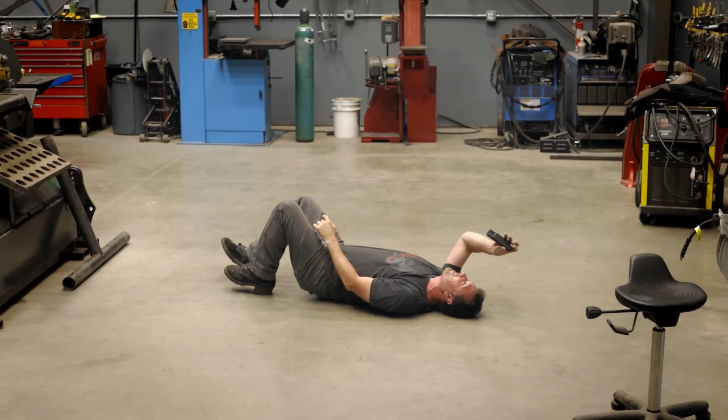Wow. Oh, this is so strange. This's gotta look weird. It's really cool.

My name is Jason, and I'm that guy rolling around on the floor. I've been a welder and fabricator for the past 20 years. During my career, I found many tools that I wanted to improve, so I started my own company where I can design better tools.

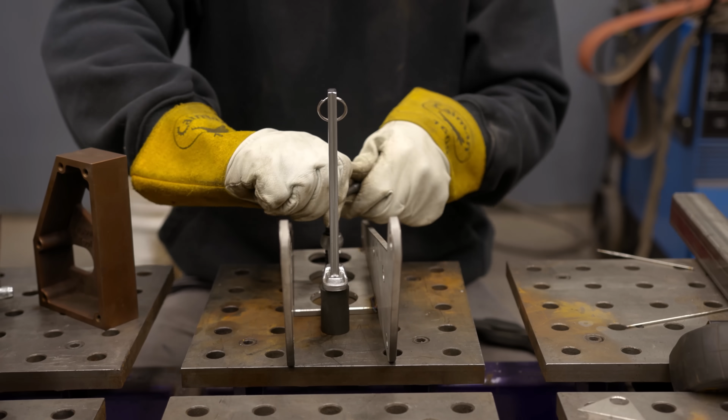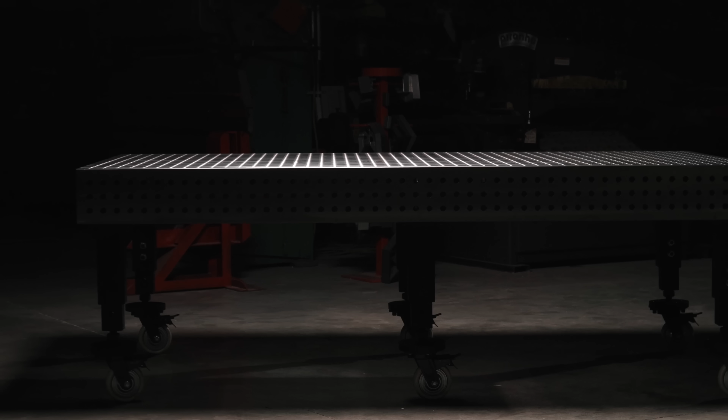This is the foundation of every workshop, a table. In my line of work, this table is called a fixture table. I've tested the industry's best tables and even prototyped my own, but unfortunately none of them have met my standards. So today I'm going to be building, hopefully, the world's best fixture table.

So what is a fixture table? It can be described as an elevated work surface with 4 or more stable legs, much like your kitchen table. But that's where the similarities stop. The fixture table's main design is to take many parts and hold, arrange, and steady them in a precise location. Once the parts are held together precisely, the next step is to often glue, fasten, or weld them together. Lastly, it aids in repetition. It's not uncommon to get an order for multiples of the same structure or product, so this helps you work quickly and effectively. Oh, and having a table that doesn't catch on fire is a real bonus too.

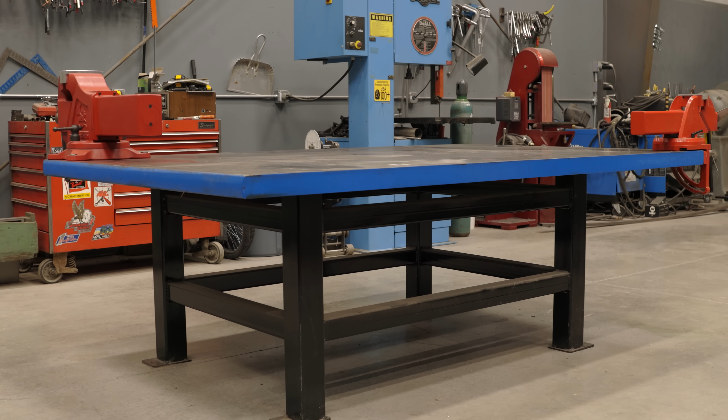So this is my very first fixture table, and it's a big piece of plate steel. This is probably considered the best welding table in the world to most people, but to me this table is just filled with problems.

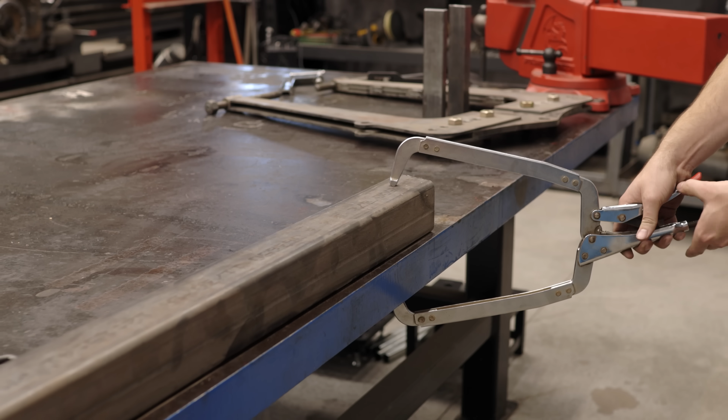The first problem you'll notice when fabricating or welding on a table like this is that you can only clamp around the perimeter, meaning you hold your parts on the edge. If you have clamps with a really long throat, that'll allow you to move your work more inboard. But how do you hold your components or parts in the middle of the table?

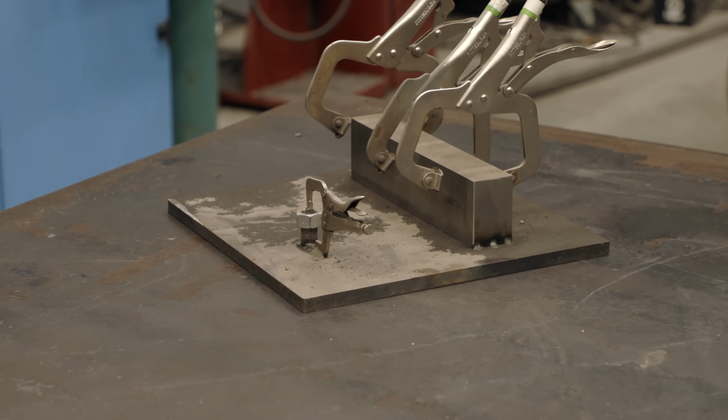The solution most people use is to actually weld the part directly to the table, just like this custom fixture. There's 1, 2, 3, 4 clamps dedicated for this part, and I can't use these clamps for anything else. What a waste of money. But this is what you've got to do when you have a table like this.

Hey, what the hell is this? Oh, you didn't really give any specific guidelines about welding.

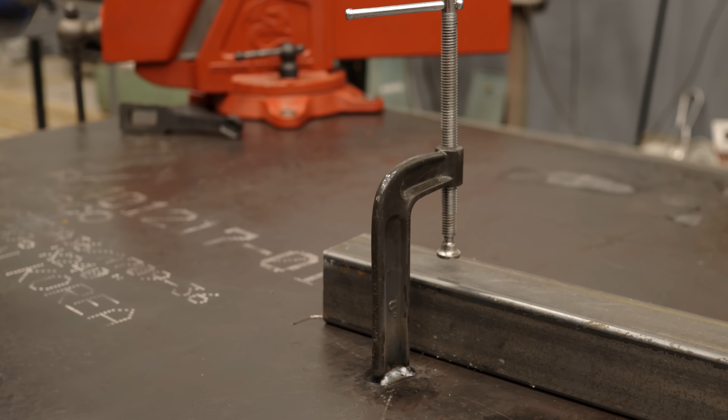The next problem after your fixture's been welded to the table is that you gotta come back and grind the goofy thing off. Not only is that slow, but it leaves the table surface compromised. And the more you do it, the more the table gets ground down, basically eliminating the flatness of your table.

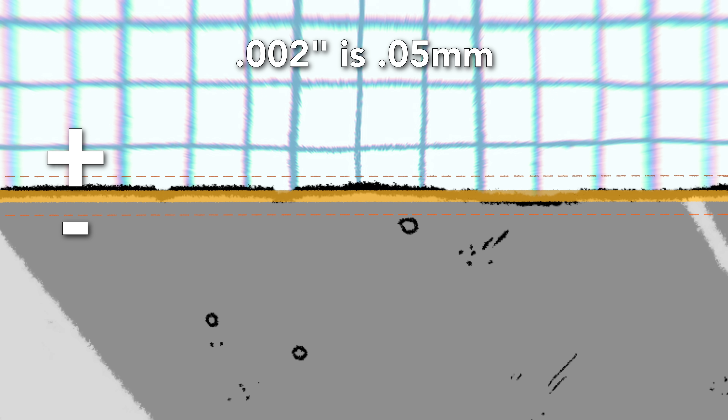I'm going to be using the word flat quite a bit, and I don't want you to confuse it with level. Level is when the surface is aligned with the Earth's horizon. So I can have a surface that's flat but not level. Let's talk about surface flatness - it can be described as the highs and lows of the table surface. We're going to be using aerospace flatness standards, like the guys that make airplanes and spaceships, who want their tables plus or minus 2 thousandths in a 2-foot area. So that's our target.

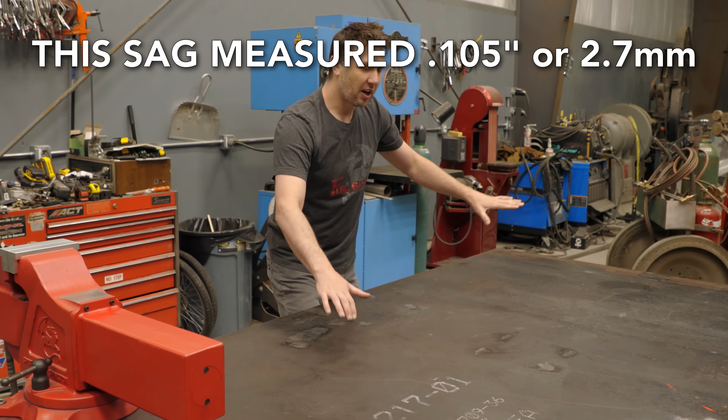So now we're back to another problem: flatness. This table is not flat because it's a piece of plate steel, and plate steel has a really wide tolerance of how flat it's going to be coming off the mill, so that's gonna be a problem too. Whatever I weld on top of this dished table is gonna follow that path. This is the same principle applied to building a house - if you start with a crooked foundation, everything above that is also gonna be crooked.

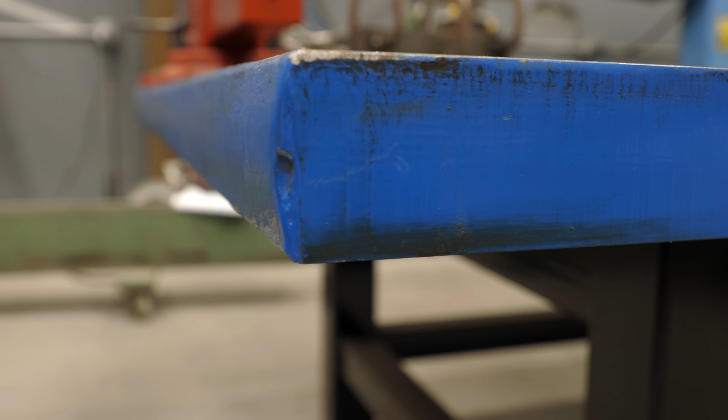Originally from the steel mill, somebody has cut this with a torch and it is not square - it's like an 89-degree angle. So I cannot use this surface and this surface as a reference. Not only that, the condition of the edge of this table is rolled because this is a piece of hot rolled plate. That's not even a flat edge to work off of or pull my tape measure from.

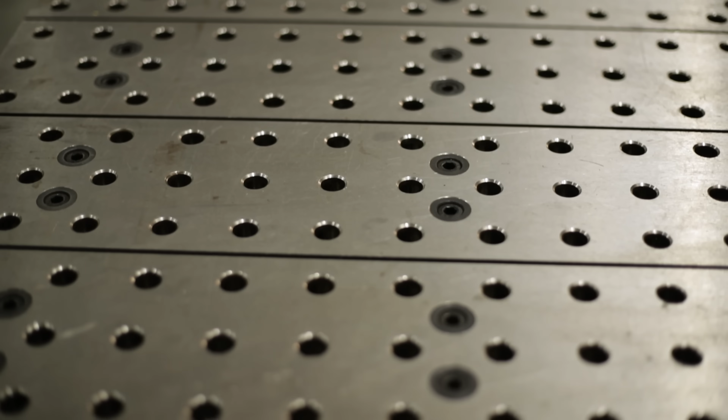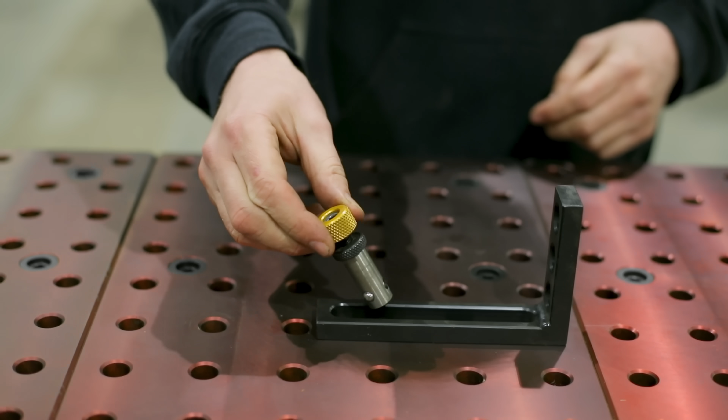Because this big huge piece of plate steel is a big problem, people have already come up with a solution: the fixture table. But even those tables aren't perfect, so let me show you. I've been collecting, studying, and reviewing these tables for years, scrutinizing every detail to find out which one worked best for me. But there's a lot of problems with them - most are the same size as a 4x8 sheet of material or smaller, and some are too large to reach across.

Some tables have holes that are spaced too far apart, warp, or even flex when they should stay rigid. And some of them just aren't even flat. I have really high standards on how I design my tools, so I wanted to fix all these problems with a new table design.

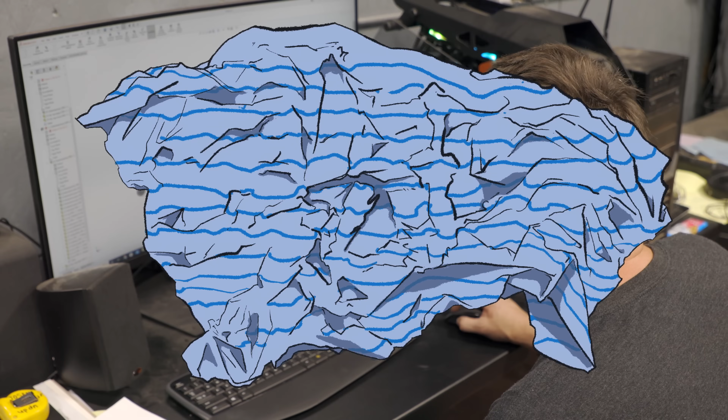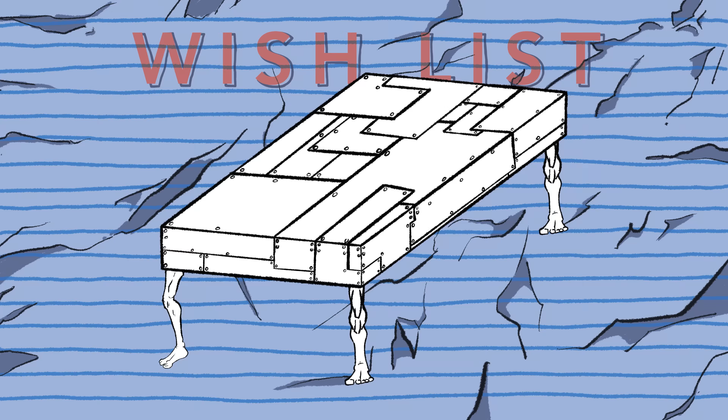Knowing all the problems with the other tables, it's time to create my fixture table wish list. First, I want the table to be a useful size. It'd also be nice for the table to be thick and heavy duty and built like a tank, and to maximize the surface area. Because I want the table to be really heavy, it's going to need some strong legs, and I'd like them to be able to elevate the table up and down. It would also be nice to move the table around without using a forklift. And I definitely don't want to weld anything to the table, so some clever way of holding the parts down to the surface would be nice.

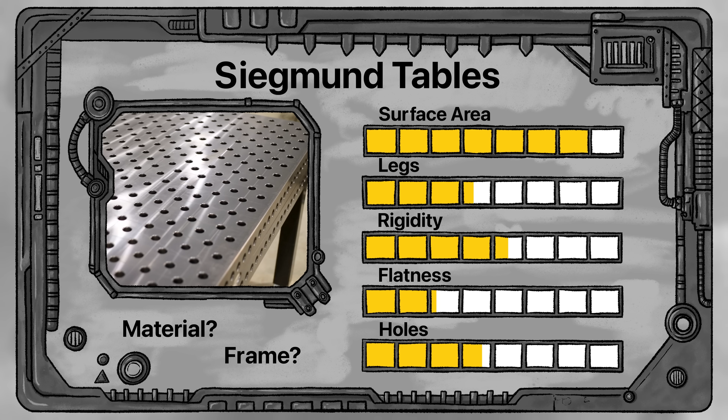Since I'll be designing a super table from scratch, we'll need a way to track its capabilities. Much like fantasy football, all the fixture tables I tested previously I've ranked in 5 individual categories. We'll look at each table that scored high in a specific category and try to meet or exceed it. But the only way we're going to find out is to actually build the table.

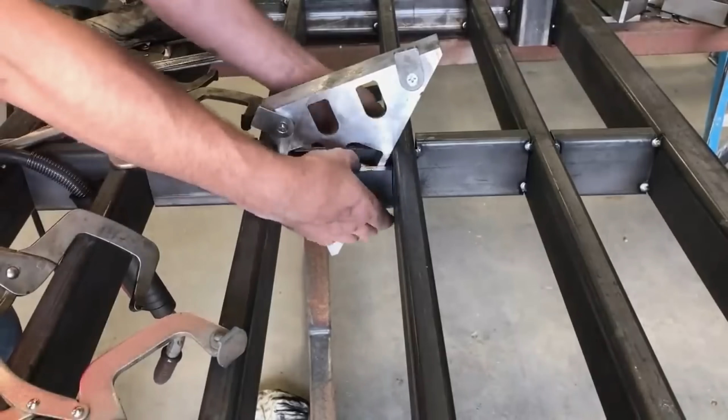So let's get started. When it comes to building a frame, I have 2 choices. One, like this style, which is a whole bunch of weldments or pieces of tube steel. The second frame style is what I call a platen, basically one big giant piece that's all one unit. So the main difference between these frames is the amount of parts.

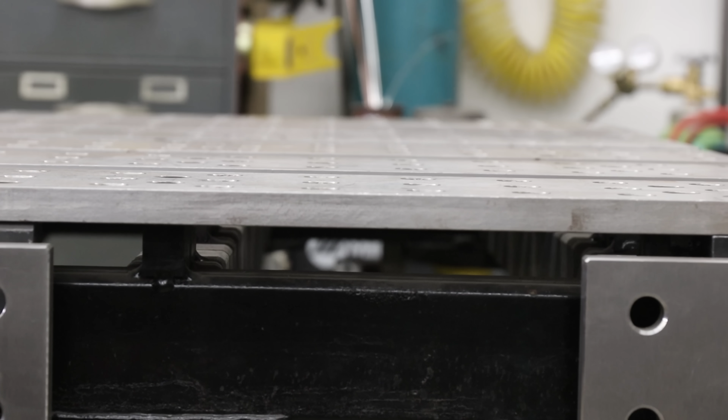My prototype table frame had a bunch of these pieces that all had to be welded together. Anytime something's welded, there's some slight distortion that happens to the frame. In order to remove the distortion and get the table back into specifications, it generally needs to be machined or milled. The other solution to a welded frame is to just cast the frame.

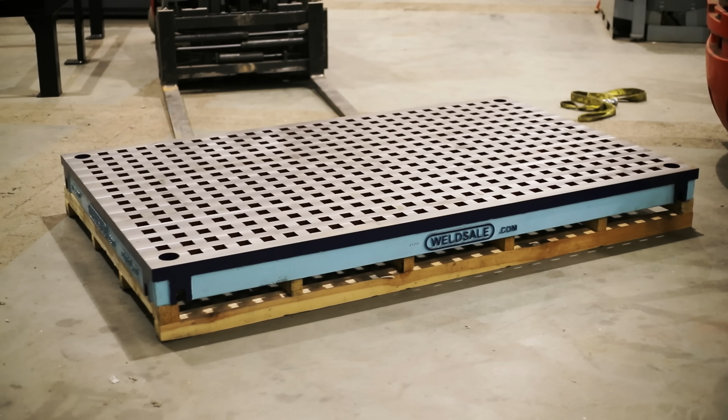And we call that a platen. Having the frame cast all in one piece keeps the parts to a minimum, plus it makes it easier to assemble. The only table that I reviewed that was entirely cast was the Weldsale table, and it excelled in its frame design, so I'm going to build my table with that platen frame, just like that one did. Being cast also allows me to be more creative in the design decisions later on.

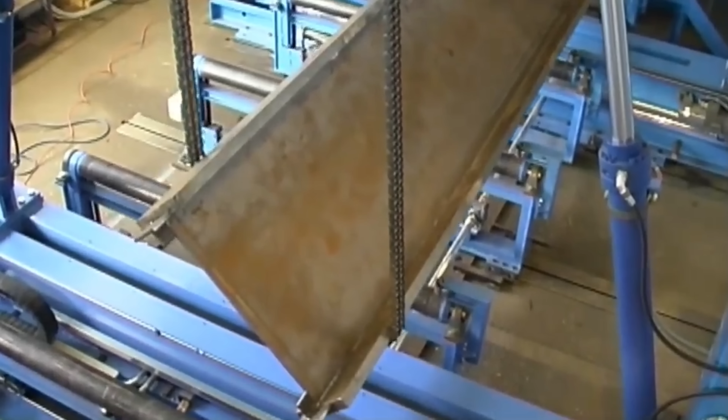So when it comes to welding table material, we have quite a few options. We have some exotic stuff, like maybe stainless steel or aluminum, but really when it comes to practicality we have 2: cast iron and A36 steel. By choosing cast A36 steel, I know it's abundant and readily available, and it can be made into any size I want. There are a few downsides though.

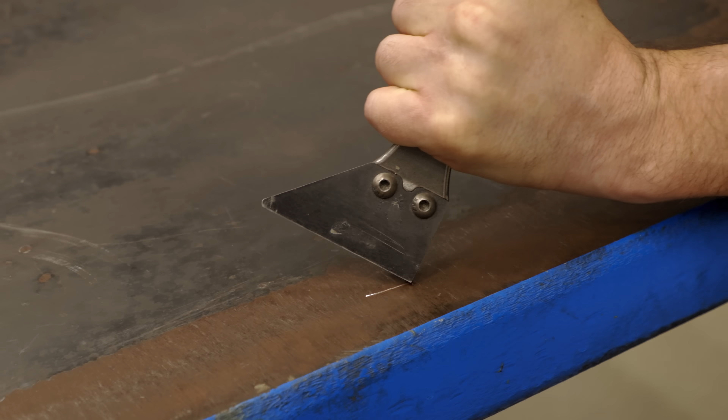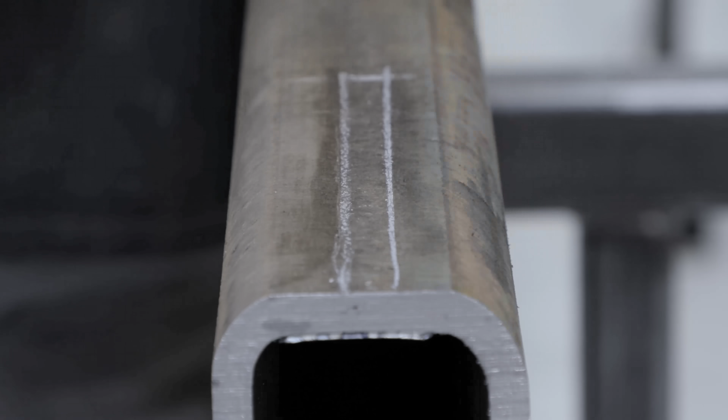When the table gets scratched, it leaves a nasty burr, meaning the scratched material gets displaced on the surface and leaves a bump, making the table less flat than it was before. Steel can also be subjected to distortion from heat, which is bad if I cast it too thin. And finally, the nemesis of all fixture tables is weld spatter, the byproduct of welding. These little BBs end up sticking to the table, and oh man, do they love to stick to steel. If I choose steel, I'm going to have to put a coating on it to prevent the spatter from sticking, or another solution is to just change material altogether.

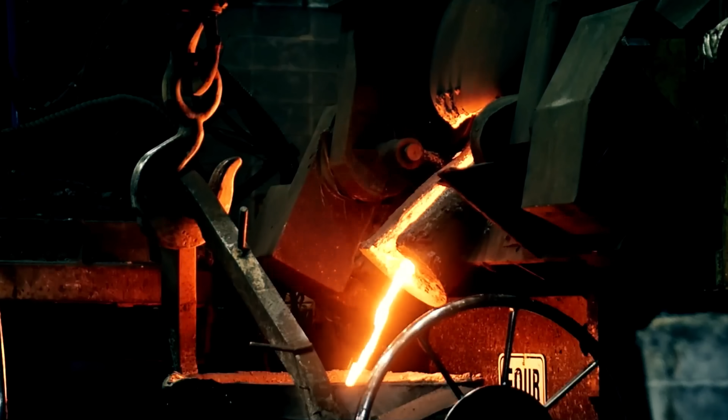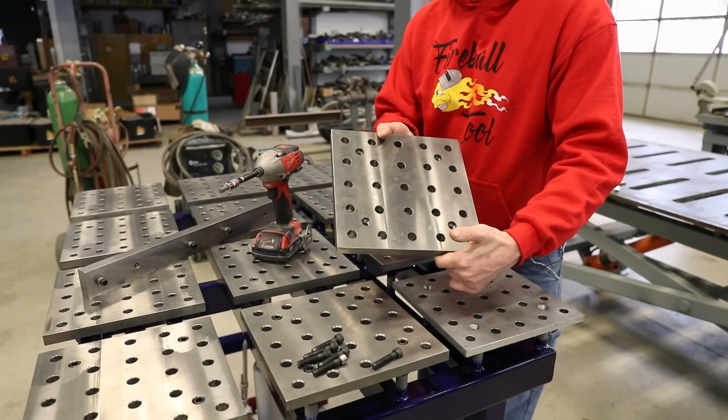We can change it to gray cast iron. One of the benefits of cast iron is that it's really hard to weld to, making it a perfect material for a welding table. That way weld spatter doesn't stick to it, making it easily maintainable. Plus it's good at conducting heat, which means less heat distortion — that's why you see engine blocks, cylinder heads, and brake rotors made out of the stuff. Another benefit is a scratch on cast iron will just turn to powder and not displace itself on the surface, so the table can remain flat and require less maintenance.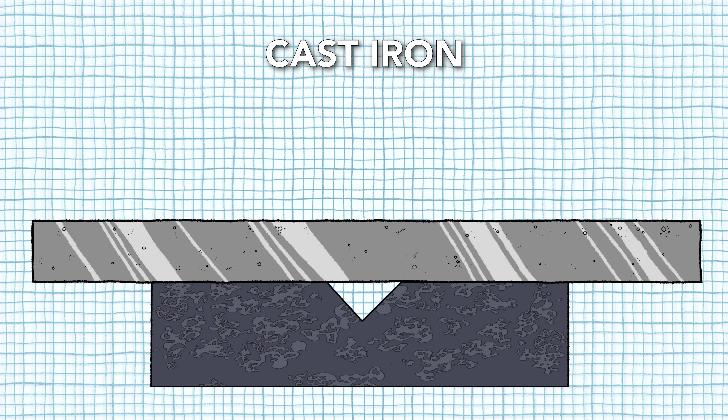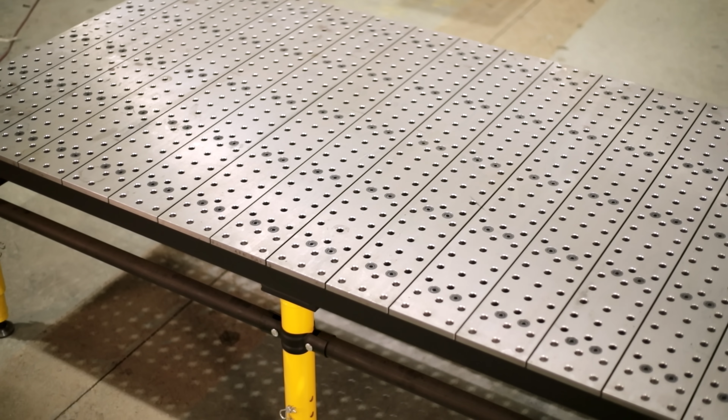The only table I reviewed that was made from cast iron was the WeldCell table, so I know my table can be a platen while still using cast iron material, which is what I'll be going with. How big should I actually make this welding table? The most common size is 4 feet by 8 feet long.

The problem with the 4x8 table is that my material is the exact same size, so putting it on the table will cover up the entire surface, practically rendering it useless. Why do welding table manufacturers even do this? I find it so frustrating.

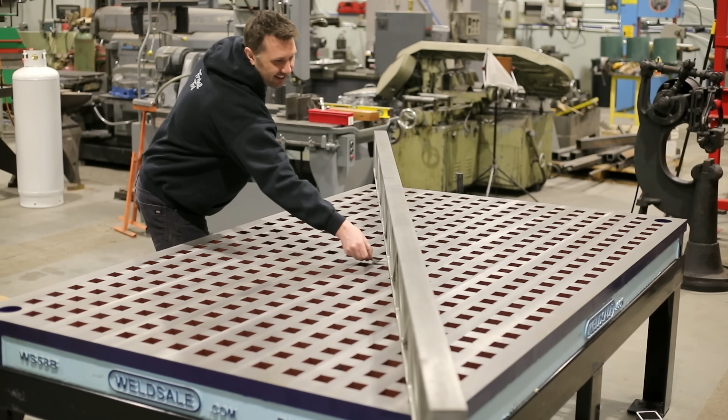Even metric tables are slightly undersized from 4x8 and have the exact same problem, so I know I'm going to make my table a little bit larger than that. But if I go too large, it will be really difficult to reach across comfortably, so I've found 5 feet to be the maximum width for that reason. As for length, that can really be anything I want, until I run into the problem of transportation and unnecessary cost. As long as it's over 8 feet, that's going to be helpful.

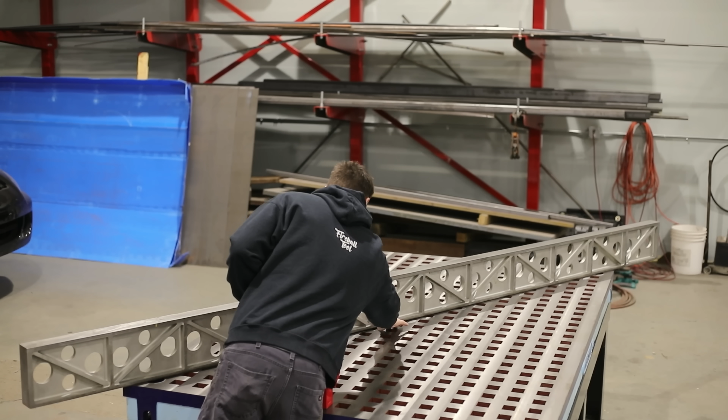The only table I reviewed that was larger than 4x8 was WeldCell's 5x8 table, which has a wider width but still only 8 feet in length, giving a surface area of 40 square feet. To find the golden size that's not too long and not too short, I'll oversize my table by 6 inches in both length and width. That's going to give us almost 20% more surface area. That only gives me 38.25 square feet.

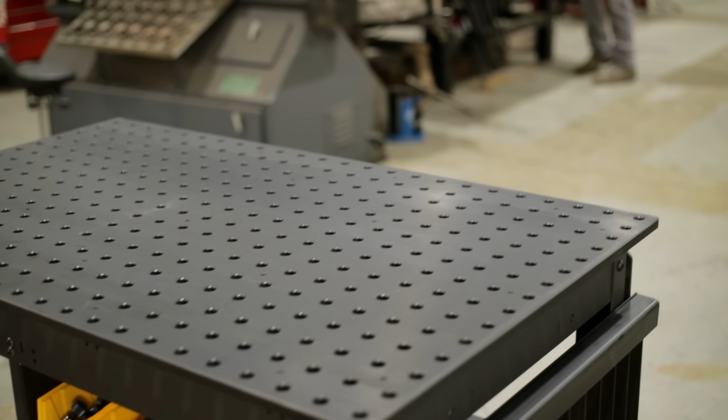This still isn't enough surface area. I want more, and the only way to get more is to maximize all the sides of the table. Many tables I reviewed did not make use of all the dimensions of the table by using its sides, including the WeldCell, and I think they missed an opportunity.

The 5-sided tables that I tested allow me to put tools on the edge of the table, which lets me extend the table surface, or even put two or more tables together to create a mega table. What do we got here? Mega desk, of course. On top of that, these sides will improve the table's rigidity.

The tables I reviewed with the most surface area was the Certiflat, which was 48 square feet. So I'm going to have my sides be at least 8 inches tall, bringing my total surface area to a whopping 55.6 square feet. That ranks this table really high on the usable surface area list.

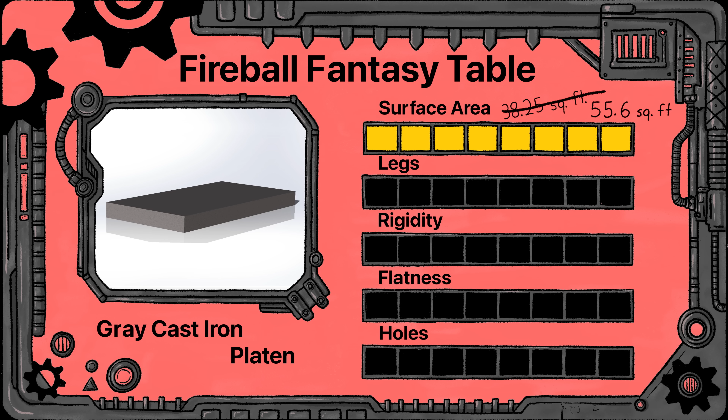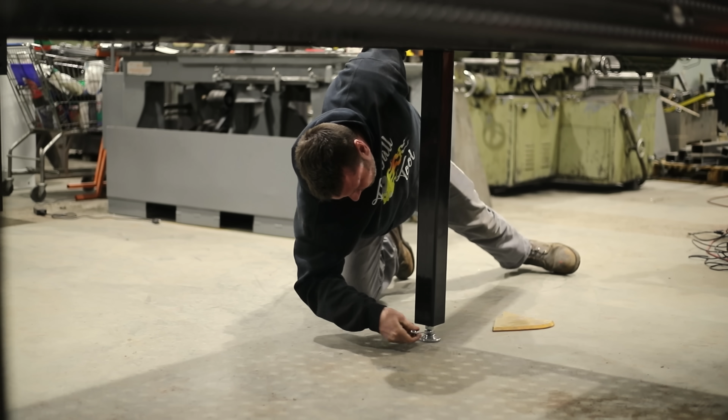I have a surface now, but I definitely don't want it to just sit on the ground. We have to talk about table legs, an important component to the table. There are so many design considerations when considering the function of the legs. At first glance, they just keep the table off the ground, but they do a lot more than that.

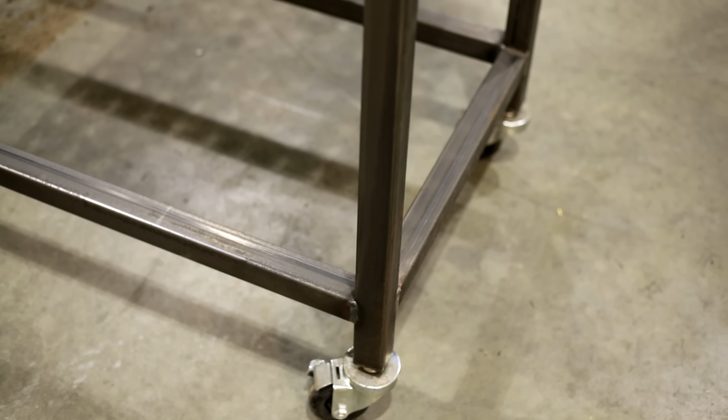They can aid in the table's rigidity, keeping the twist out of it. They can also make the table mobile, allowing it to move around the workshop. And finally, its ergonomics can assist the user by being able to adjust the height for comfort, for sitting or standing, or even being able to store something underneath.

Not all tables are designed like this though. In this case, this table right here, these legs are height adjustable, which I like, but they're kind of spindly, so the manufacturer has given us braces. They're actually designed to be down here, this low.

I found that these get in the way if I'm going to store stuff underneath. If I move these up high, they actually get in the way of me sitting at the table. So naturally, I just took them off completely.

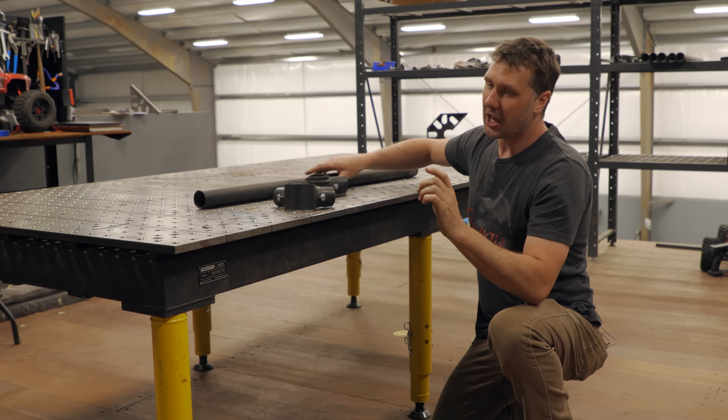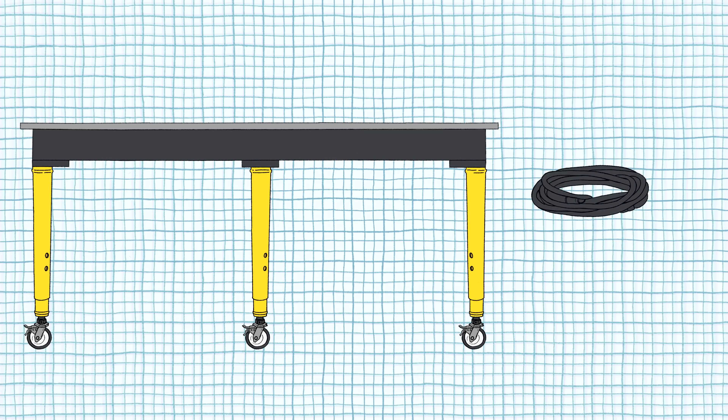There's consequences with that, because this table was designed to have the braces around it, and there's only one attachment point up here in this table leg, so I have to be very careful not to shake, rock, or roll this table, because I could literally fold the table over on the legs.

Where the legs mount is really important. They cannot exceed the outside surface of the table. This is going to allow me to pair two table surfaces together, or marry them, or expand the surface if I want to, without the legs interfering with each other, while also remaining height adjustable and mobile on wheels. How cool is that?

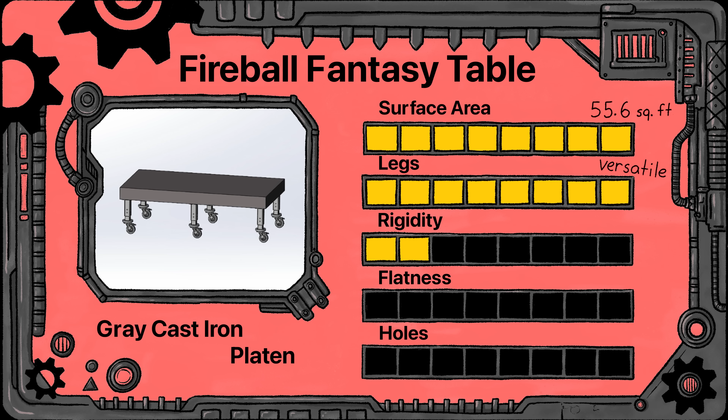I won't have to worry about the legs folding if they roll over an extension cord or cable around my shop. Now that I know the size and shape of the table, it's time to focus on making the table straight and strong, and trying to achieve that aerospace flatness.

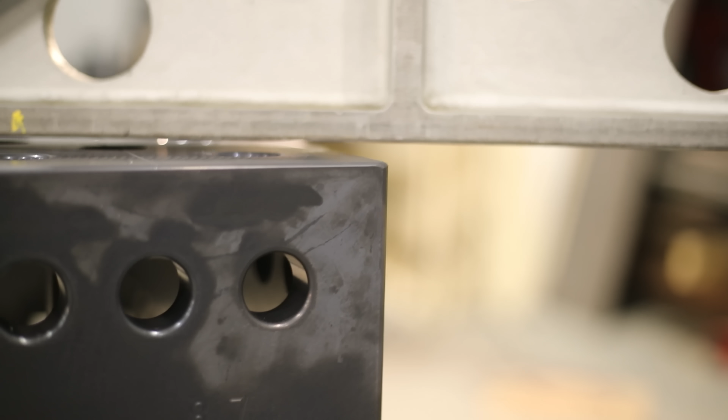The tables I've tested vary from being super limp and noodly to extremely rigid, with the WeldCell and the 5/8 Build Pro deflecting 5 thousandths of an inch. The 28mm Build Pro even got as thin as 4 thousandths of an inch.

But I want to surpass these numbers to achieve the aerospace result of 2.5 thousandths of an inch over 2 feet. So how are we going to do it? I'm going to be designing the table with CAD, and this allows me to build the table and test it in a simulation.

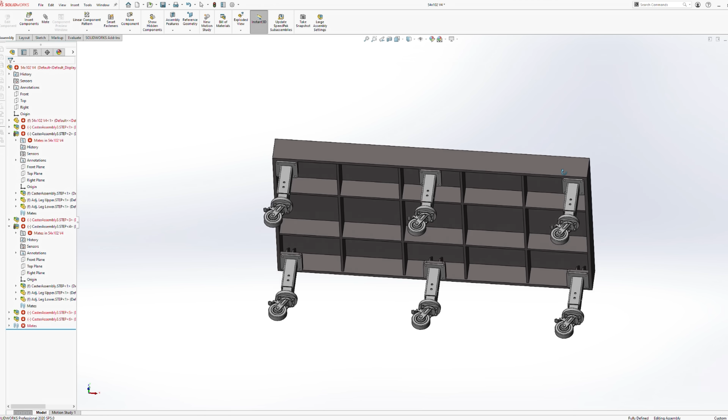By adding ribs to the platen, I can test its predicted strength and deflection. Changing the amount of ribs and the height, the thickness, and even the location will all add to the rigidity, and also trying to reduce the cost of manufacturing.

CAD also can calculate the weight. I think I ended up around a 3,000 pound platen, but we won't know till we see it in person. I think I ended up with a good balance between weight and rigidity.

This sturdy table is no more special than a fancier piece of plate steel, so it's time to give it some utility. So let's talk about holes for a second.

I can have all my parts on the table, but how will I clamp them down now? A clamp will only work on the edge of the table, so that only leaves me with the perimeter surface. Not only would it be nice to hold my parts down, but I need to arrange my components in a certain way, or whatever the drawings call out for. So some sort of grid pattern would be nice also.

I think we can align and hold parts down at the same time. So the way to solve that problem is putting a hole on a grid pattern. And that raises the next question: how many holes do we need? And how often are they? And how far apart are they spaced?

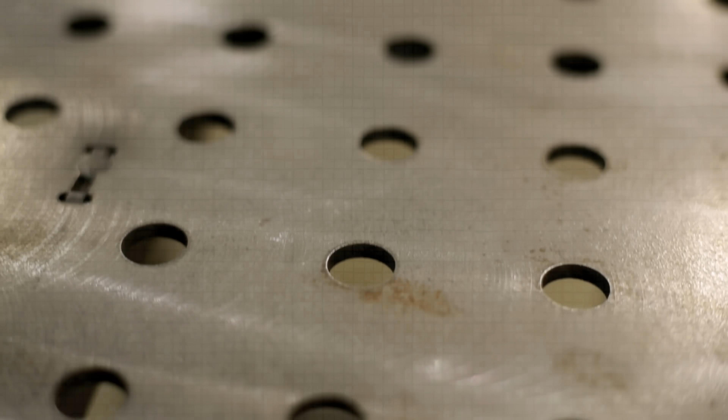Ideally, the more holes I have, the more tooling I can use. If I put too many holes in the table, it could potentially make the surface weaker. Also, there's going to be some spots where it might interfere with the ribbing or the table structure underneath, so we have to avoid that.

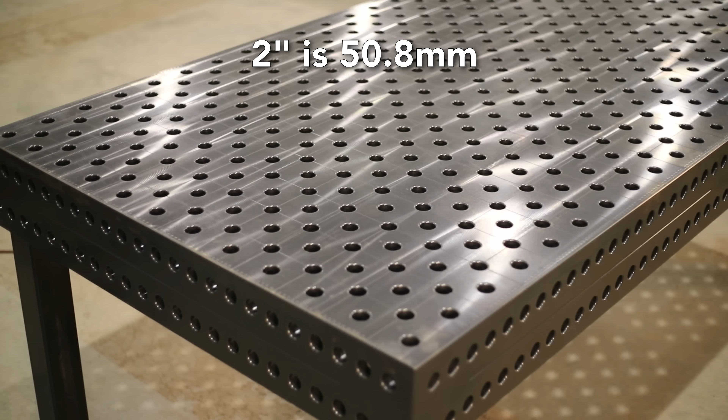So 2 inches apart seems like the sweet spot. It's not too wide, not too close, and doesn't interfere with any of the table structure.

Now that we know we're going to put a hole, what does that hole look like? Well, we have two choices, and the first one is to thread the hole, so that the table acts like a nut. But there's some problems with that too.

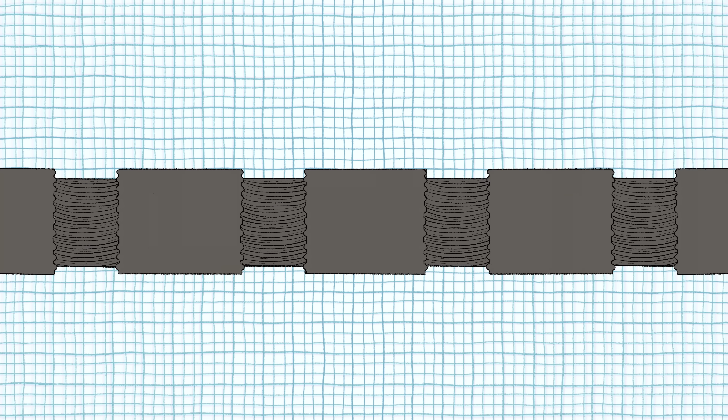The threads offer a place for the grit and grime to hide, and they're always a pain to maintain. Not only the fact that they could get damaged and basically wreck the hole. And then there's cost of manufacturing — 1,756 holes being tapped is expensive, and nobody wants to pay for that.

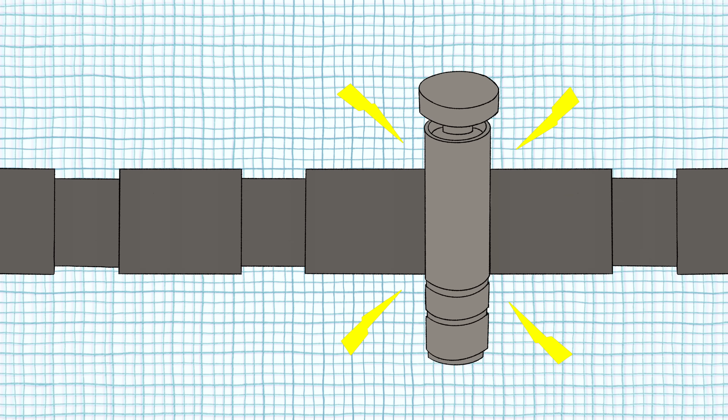One way to solve this problem is to make a smooth bore hole. We can lock the tooling to the table with the smooth bore hole by creating some sort of binding effect. And once pressure is binding, it's really going to grip the inside of the hole. This makes maintenance a breeze compared to threads. Plus, it's a bit faster to pull the fixture from the smooth hole than have to unthread one.

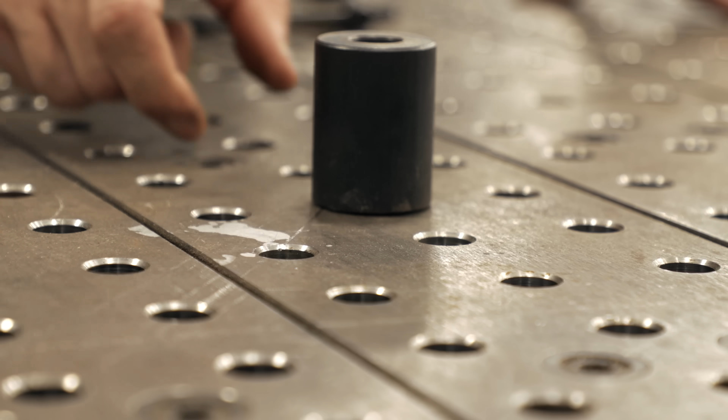What size should the holes be in the tabletop? In the current table market, you have two popular sizes, a 5/8 hole or a 28 millimeter. One is really big and one is small.

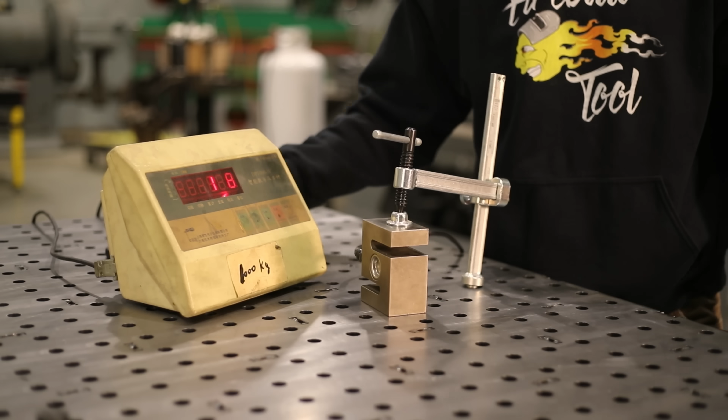I've found that the 5/8 hole system has some drawbacks. The fixtures are really small and lightweight. The clamps don't have a lot of clamping force, and generally the 5/8 tables are much thinner in size.

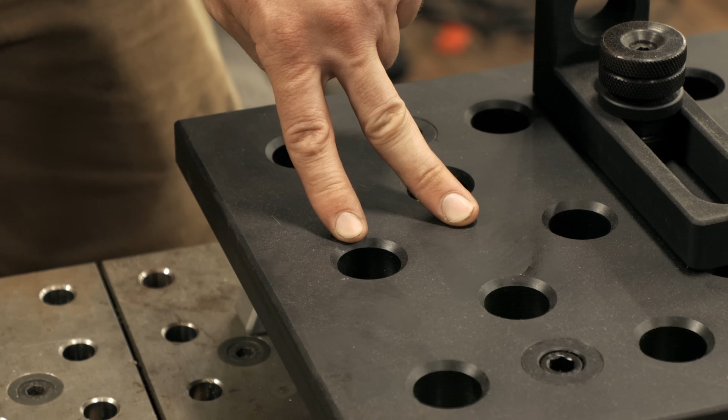The first thing I don't like about the 28 millimeter setup is that the hole spacings are too far apart. Generally they're on 4-inch hole spacings or 100 millimeter, and that really doesn't give you enough hole locations to precisely locate your clamps. Also, the fixtures are really long to span those 4-inch hole centers.

The fixtures are big and expensive, so I want something right in the middle, and I think we can build that — that hole diameter for me is going to be 3/4 inch. When you look at 3/4, that's the largest we can fit on a 2-inch grid, and the fixtures are strong enough to be able to take a lot of clamping force.

This seems to be the perfect hole size for this table. All the benefits with none of the drawbacks.

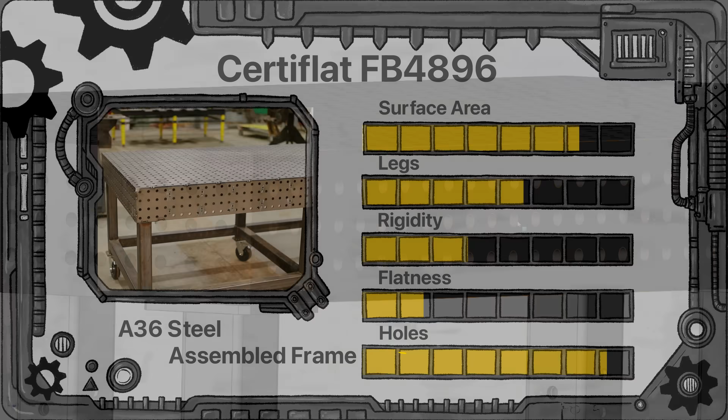The welding table that I tested that had the most number of holes was the Certiflat Fab Block, and that had 1,728 holes. For the Fireball table, its size and grid pattern pushes it up to 1,756 holes.

Now that the table's all designed, I want to look at it through augmented reality, or AR, and I'm going to use my phone to do that. This is going to allow me to walk around it, see its size, shape.

This looks so strange, I'm smiling from ear to ear. How neat is that? If you guys would like to see this table on your own, I'll leave a link down below so you guys can check it out on your phones also.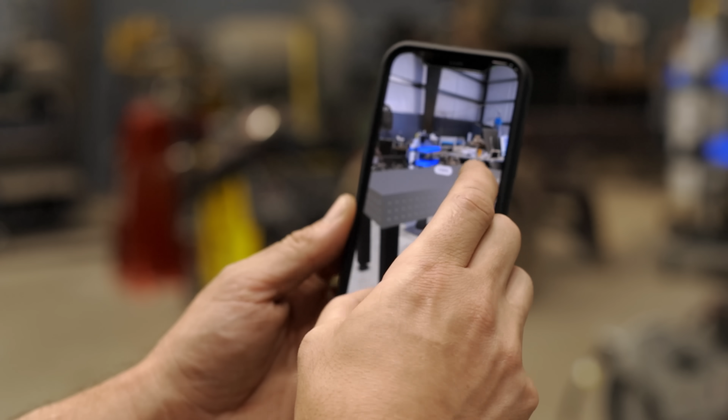Here's the small table. I'm going to move it wherever I want, twist it around, and plop it right there, and now I can see the small table. I love the world we live in right now.

I'm going to sit at the table. This is going to give me a good perception of where my knees are. Yep, that is so cool.

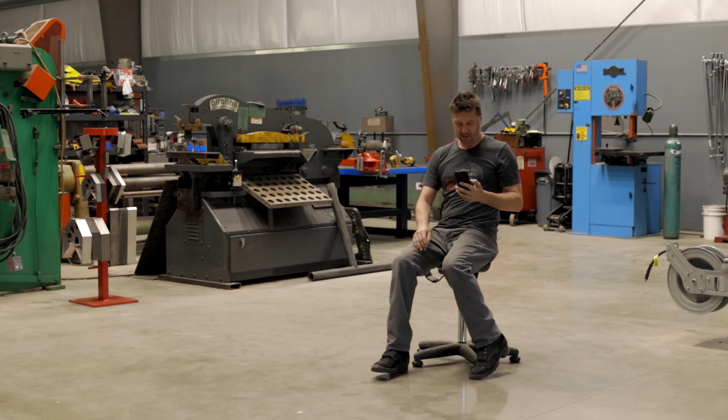It's looking great. I think I've checked all the boxes off my wish list, but I'll only know when it arrives. So let's get it made.

First, we're going to need a pattern. Usually it's made of wood and is a replica of my CAD model, but with some draft angle added in. That pattern gets pressed into sand. It is then removed, leaving behind a void that the molten metal will fill up.

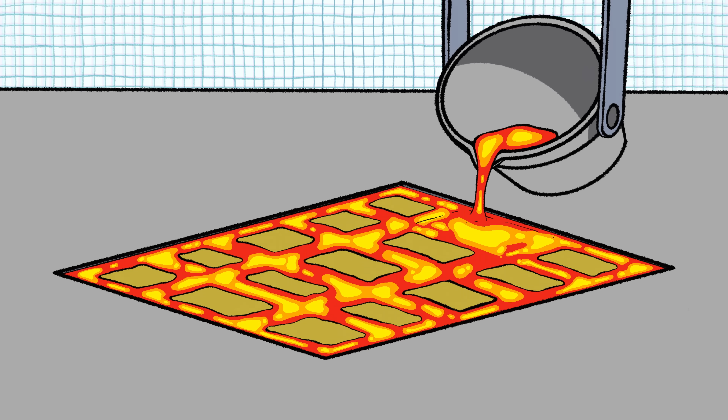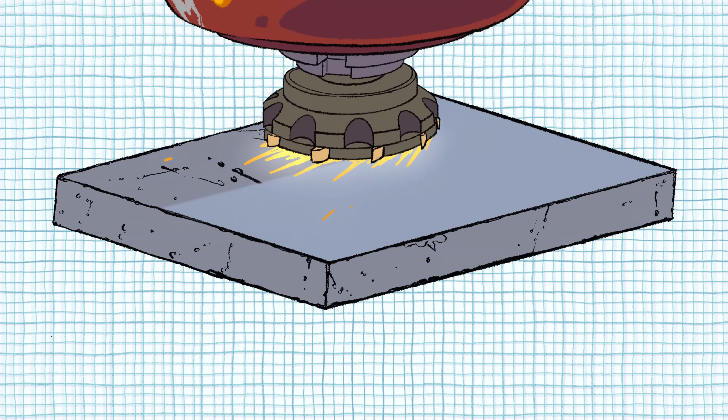After it cools, the platen is pulled out of the mold and is placed on a gigantic gantry milling machine. This removes all the extra rough material from the surface, bringing it to its final size and flatness. Then after the milling, all 1,756 holes get drilled on that perfect 2x2 grid pattern.

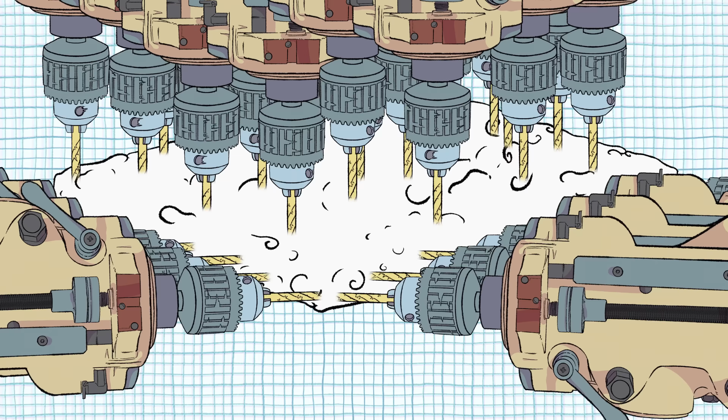As I wait for the table delivery, I need to make sure the table isn't completely useless. So let's talk about table fixtures, or the tools that go on top of the table. This is the most important thing on any fixture table system, and I think it's the part that most people forget about.

You have to think of this table much like a game of chess. Sure, the board is nice and it keeps the pieces within their boundaries, but it's the chess pieces that perform the specific tasks. In the case of a welding table, the fixtures hold the parts precisely in 3D space.

The problem is that I'd like all the pieces to play the game. If I lose one, I can't play. So what if I took these pieces and morphed them into a super piece, one that can perform the tasks of many? That way I'll be able to have fewer fixtures that end up doing more.

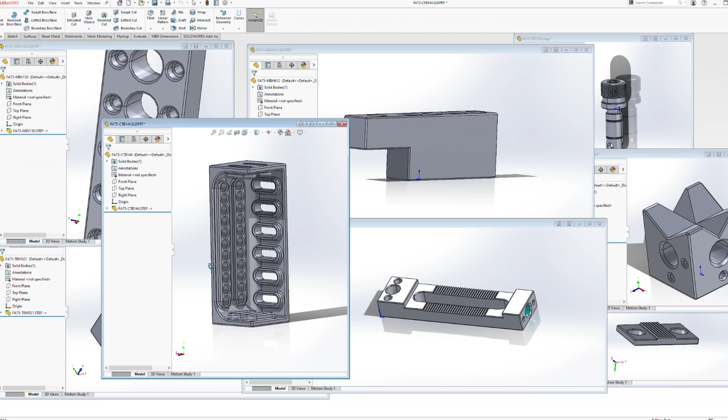This design principle is something I took into CAD in order to create a modular fixture that solves this problem. Now when I get the table back, I'll be able to hold my parts down with precision, but have the pieces do the tasks of many.

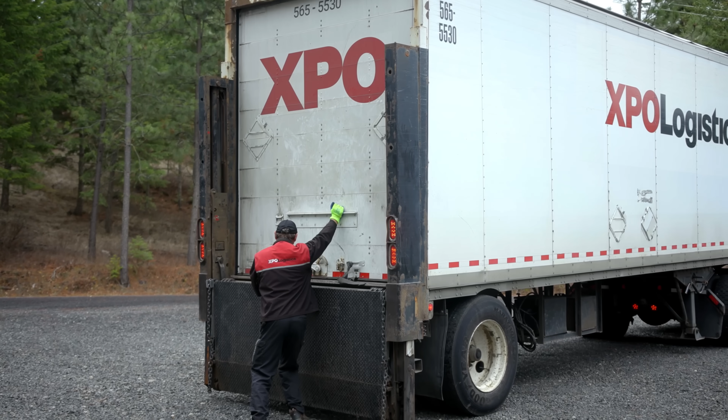I would love to go into greater detail, but a truck just pulled up outside with a surprise inside.

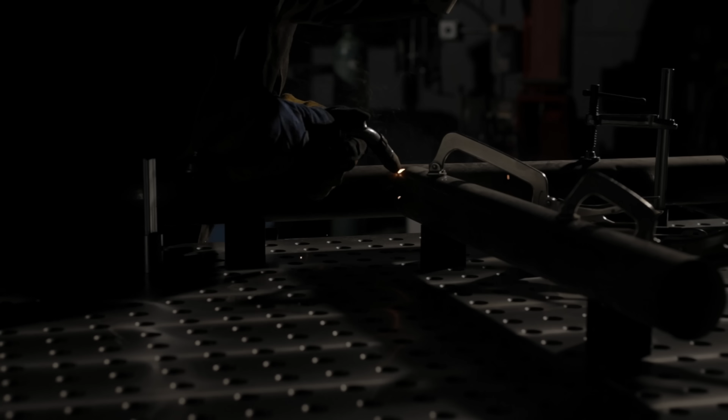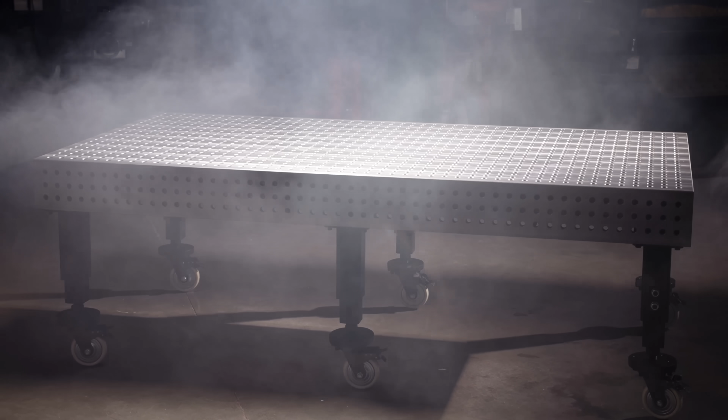Look at that! This thing looks fantastic. Now that it's here, let's see if it holds up to my expectations.

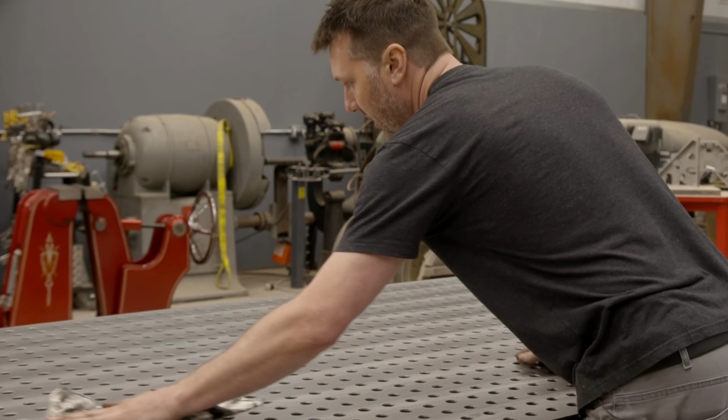So let's run a test. Remember, I'm trying for aerospace tolerance, which is plus or minus 0.002 of an inch in 2 feet. Let's give the table a quick wipe down and we'll throw the straight edge on top and see how flat it is. I'm going to run this test exactly the way I did in the table review, and then we can compare it to the others that I tested earlier.

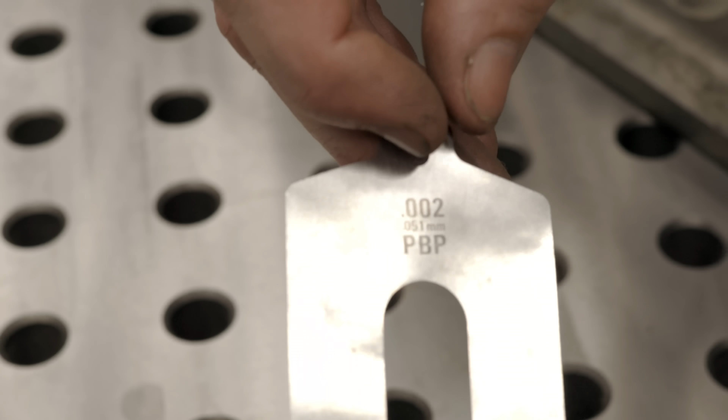So here's a 0.002 shim. This cannot slip underneath the straight edge. That's touching, we just go along the straight edge. No, sticky, sticky, sticky. I mean, that's like 2 to 3 thousandths over the entire distance. Let's turn it the other way. Nope, stuck, stuck, tight, tight. So I cannot get a 0.002 shim underneath there.

So you can literally pluck a hair out, put it on this table, and I want to see if the straight edge teeter-totters on it. So what should happen is if I twist this, it should pivot. It's literally pivoting on that 0.002 shim because that's the high spot. Isn't that nuts? This is the most accurate welding table that I have ever measured.

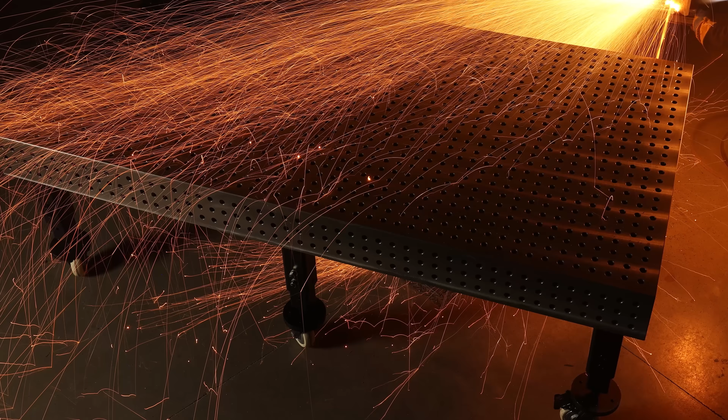I can't believe it's taken me 4 years to get to this point, and this table exceeds all my expectations and then some. I know this table is going to work perfect for me, and I'm absolutely confident that it's going to work for you too. There's a big gap in the table market right now, and I know that this table fits right in there.